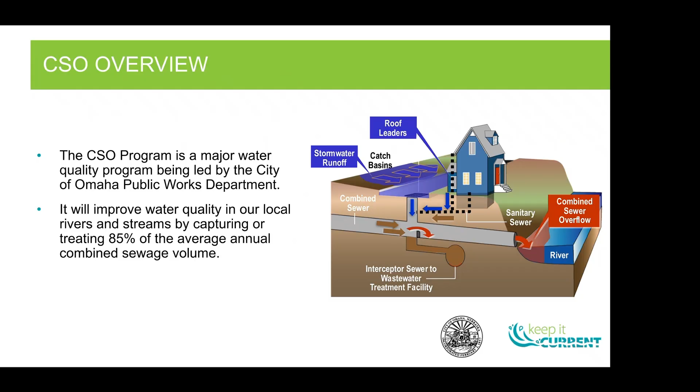The CSO program is a major water quality program being led by the City of Omaha's Public Works Department. This program was developed to help reduce the amount of combined sewer overflows that enter the Missouri River and Papillion Creek by capturing or treating 85% of the average annual combined sewage volume, therefore reducing the amount of untreated sewage that overflows into our rivers and streams when the sewer capacity is overloaded.

There are three primary goals for the CSO program. The first goal is to achieve regulatory compliance. This is achieved by meeting specific requirements as identified by the Environmental Protection Agency and the Nebraska Department of Environment and Energy. The second goal is to achieve economic affordability, which is achieved by minimizing cost impacts to ratepayers by completing CSO projects within or under budget. The third goal of this program is to achieve community acceptance. This is done by maintaining continuous public dialogue and providing information to the public, as well as pursuing opportunities for multiple benefits in CSO projects.

You may notice that the branding on this presentation has changed from the CSO branding you may have seen on past presentations to the Keep It Current branding. This is because as the CSO projects are being completed and the CSO program comes to an end, the city will continue to utilize the Keep It Current branding to help bring you information on all types of collection systems projects.

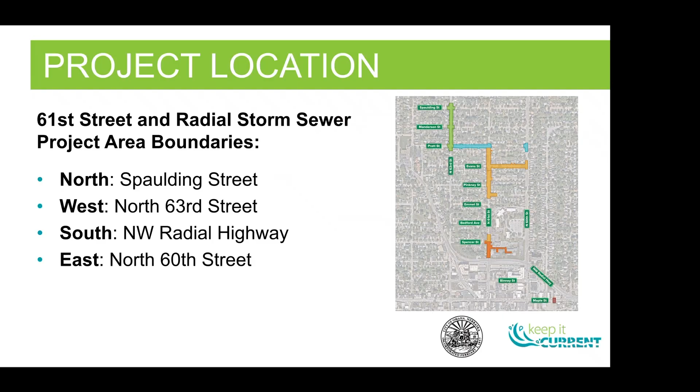Now, to go into more detail about our project, I'd like to begin by talking about our project area. The 61st and Radial Storm Sewer project area is generally bound to the north by Spaulding Street, to the west by North 63rd Street, to the south by Northwest Radial Highway, and to the east by North 60th Street. There is a small segment of work that will be required to be performed along Maple Street between Northwest Radial Highway and North 59th Street that will be discussed later in this presentation.

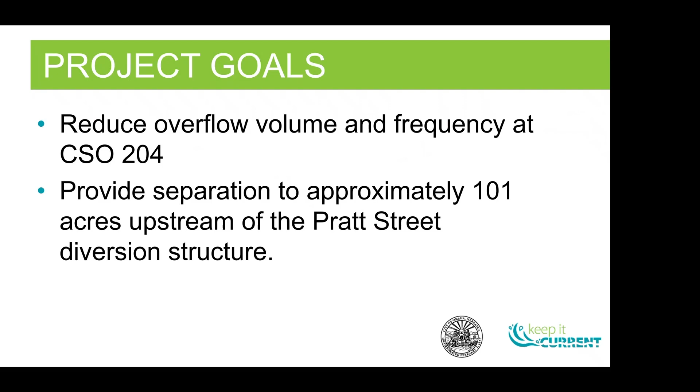The goal of this project is to reduce the amount of overflow volume and the overflow frequency at CSO 204, which discharges into Cole Creek. This will be achieved by providing separation to approximately 101 acres upstream of the Pratt Street diversion structure. This project will include improvements to the storm sewer system by constructing new storm sewers, as well as constructing new sanitary sewers. Existing combined sewers will be separated and reused as dedicated storm sewers. This project will also construct new storm sewer inlets within the project area and replace pavement and sidewalk.

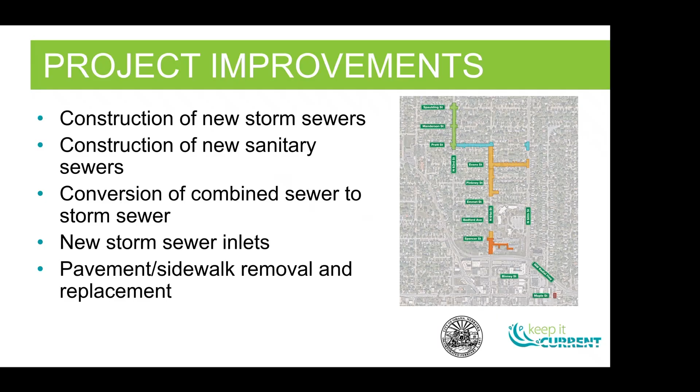Construction is anticipated to occur over a 2-year period, beginning in spring of 2027 and being complete in spring of 2029. It is anticipated that work will begin near the intersection of North 63rd and Spaulding Streets and continue to progress to the south and to the east.

Construction activities will include removing and replacing streets, removing and replacing driveways and approaches, removing and replacing sidewalks, with the replaced sidewalks being designed to achieve compliance with the Americans with Disabilities Act. New storm sewers and inlets will also be constructed. In order to complete this work, some tree removals will be required. Work will primarily occur within the existing right-of-way. However, some easements will be required to complete the work.

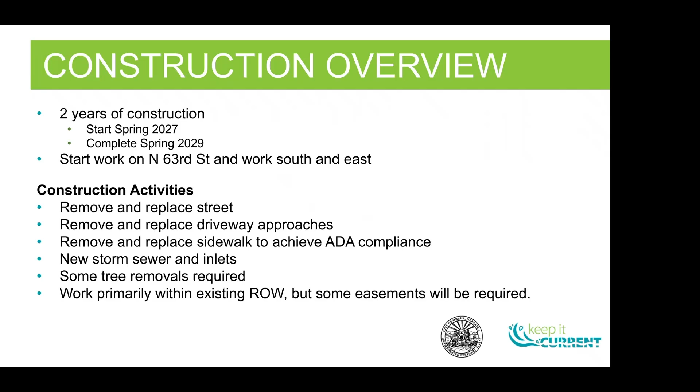The first steps to the construction process will be to begin relocating utilities within the project area. This means that MUD will be relocating gas and water mains prior to construction of our project, and OPPD will be relocating overhead power and power poles.

With the utility relocations performed, the selected contractor will be able to begin work on the project by performing surface removals, which includes removing pavement, sidewalks, and select trees. With the pavement removed, this will allow for the installation of new storm sewers, sanitary sewers, and inlets. Once these underground sewers have been installed, new pavement and sidewalks will be constructed, and all disturbed areas will be seeded with new grass.

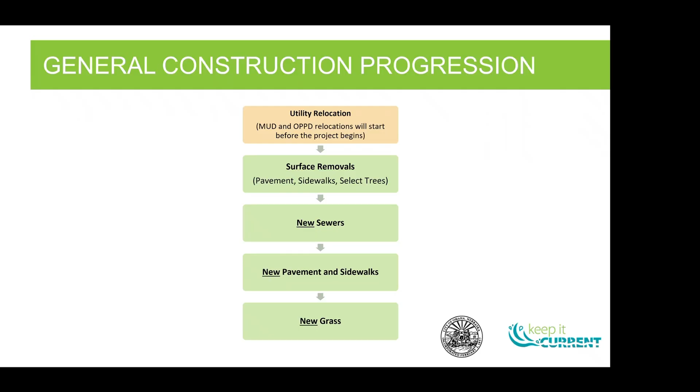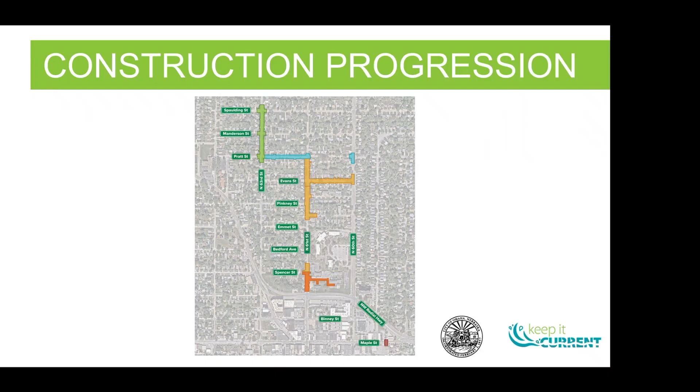Our project will be broken down into 4 phases, with work beginning near North 63rd and Spaulding Street and continuing to progress to the south and to the east. The first phase of this project will include work along North 63rd Street. This will include removing and replacing the roadway along North 63rd between Spaulding Street and Pratt Street. This is to allow for new storm and new sanitary sewers to be installed. This new storm sewer will help the project tie into the existing storm sewer system at North 63rd and Spaulding Street.

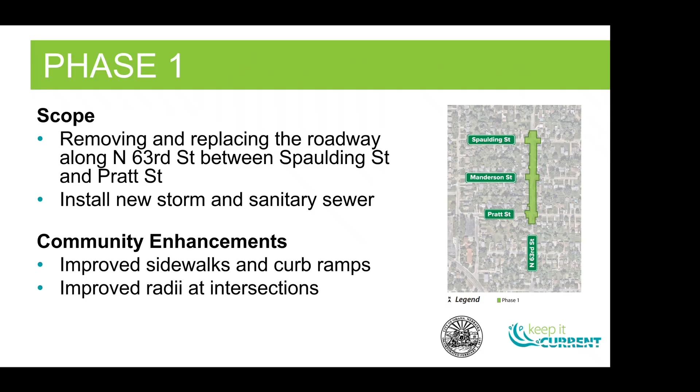This phase will also include improvements to sidewalks and curb ramps to meet ADA compliance, as well as improving the radii at intersections to meet current City of Omaha design desirables. In order to complete this work, a full road closure will be required along North 63rd Street from Spaulding Street to Pratt Street. During this time, temporary access will be provided to residents within the area. However, some day-to-day disruptions should be anticipated based on the contractor's activities.

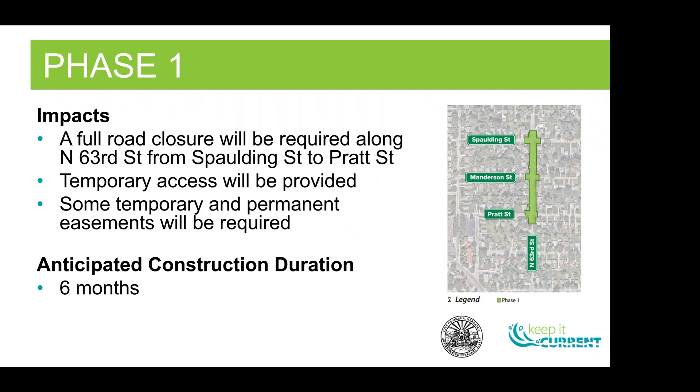Some temporary and permanent easements will be required in this phase. It is anticipated this phase will occur over approximately 6 months. During this time, detour routes for both pedestrians and vehicles will be posted, utilizing existing sidewalks and roadways within and adjacent to the project area.

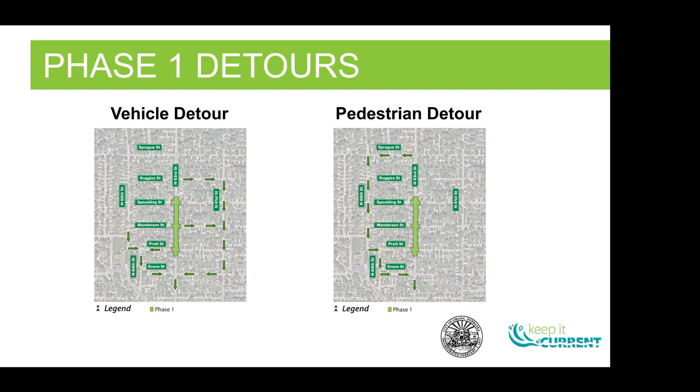Once all pavement has been restored during phase 1, the contractor will move to phase 2, which includes work along Pratt Street between North 63rd Street and North 61st Street, as well as work being performed within the North 60th Street and Pratt Street intersection. The roadway along Pratt Street will be removed between 63rd and 61st to allow for installation of new storm and sanitary sewers, as well as to allow for construction of a new diversion structure.

This new diversion structure will operate similar to the existing structure. However, this will allow us to reduce the amount of overflows that occur and send untreated sewage to Cole Creek. This new diversion structure will also help to reduce the amount of localized flooding in the area during rain events. Additionally, new sidewalk will be added to the south side of Pratt Street.

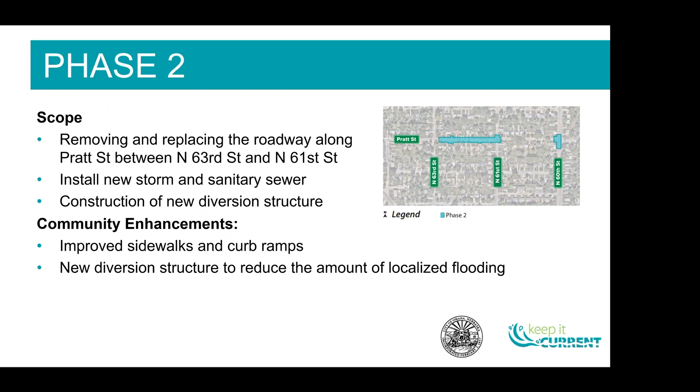The work on the North 60th and Pratt Street intersection is being performed to remove an existing sanitary service line from an existing combined sewer and rerouting this service to a dedicated sanitary sewer. This will help facilitate the conversion of the combined sewer into a dedicated storm sewer. While this phase is being constructed, a full road closure will be required along Pratt Street from North 63rd Street to North 61st Street. During this time, temporary access will be provided, though some day-to-day disruptions should be anticipated. Some temporary and permanent easements will be required to complete this phase.

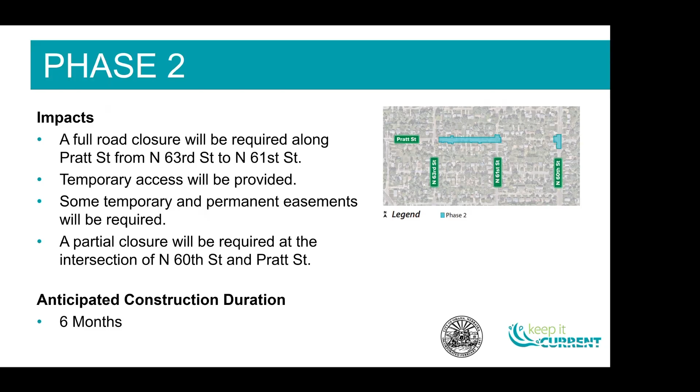Additionally, the work on North 60th Street will require a partial road closure at the intersection of 60th and Pratt Street. It is anticipated that the work will remain contained within the west 2 lanes of North 60th Street. Therefore, traffic control can be used to keep 60th Street open during construction. It is anticipated this phase will occur over a 6-month period. During this time, pedestrian and vehicle detour routes will be posted utilizing existing sidewalks and roadways adjacent to the project area.

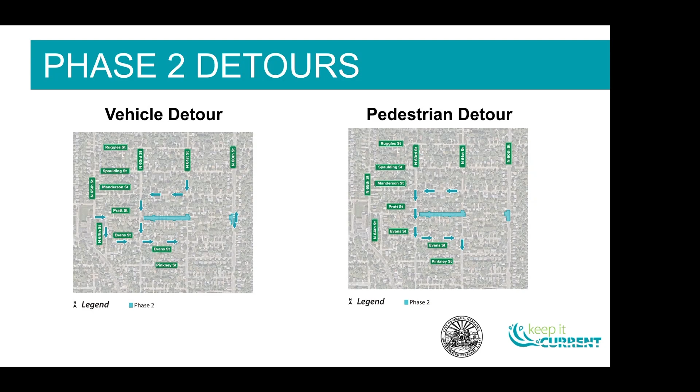Phase 3 will be broken down into 2 subphases. During both subphases, the construction will include installing a new storm sewer from Spencer Street to Pinkney Street using trenchless technology. While this is occurring, construction of Phase 3A will include removing and replacing the roadway along North 61st Street between Pratt Street and Evans Street to install new storm and sanitary sewer. Phase 3A will also include removing Evans Street between North 61st and North 60th Street to allow for the installation of new storm sewer. On Evans Street, the existing sanitary laterals will be rerouted to a dedicated sanitary sewer, helping provide further separation.

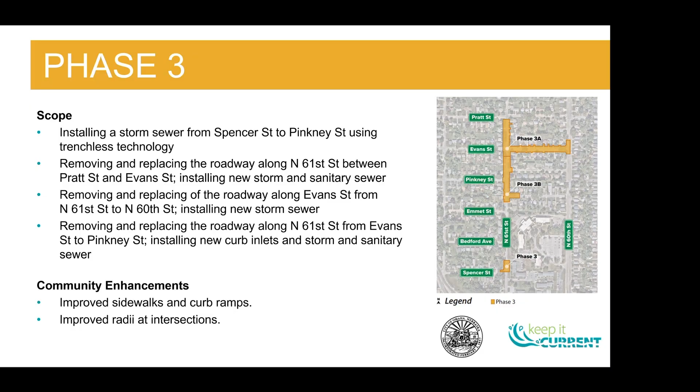Once all pavement has been restored in Phase 3A, Phase 3B will begin, and this will include removing and replacing the roadway along North 61st Street from Evans Street to Pinkney Street and installing new curb inlets and storm and sanitary sewer. The radii of the intersections within this phase will be improved to meet current City of Omaha design desirables, and sidewalks and curb ramps will be improved to meet ADA standards.

To facilitate the installation of the trenchless sewer, a full road closure will be required along North 61st Street between Emmet Street and the North Pinkney Street intersection, as well as along North 61st Street at Spencer Street. This closure will be in place throughout the duration of the tunneling activities.

Phase 3A will require a full road closure along North 61st Street from Pratt Street to Evans Street, and from Evans Street between North 61st Street and North 60th Street. Lane restrictions will be required on North 60th Street at Evans Street while the work is being performed within the intersection. Upon completion of Phase 3A, traffic control will be installed for Phase 3B and will require a full closure along North 61st Street between Evans Street and Emmet Street.

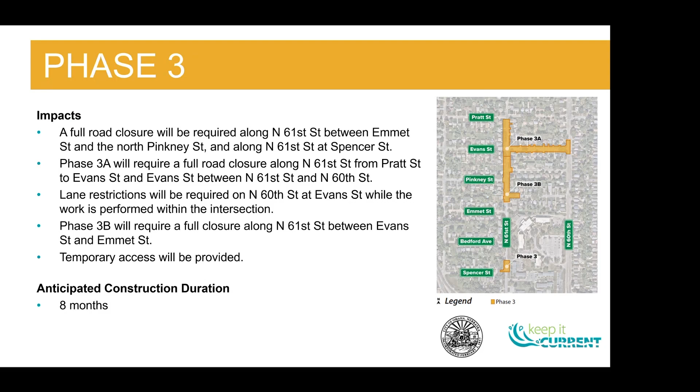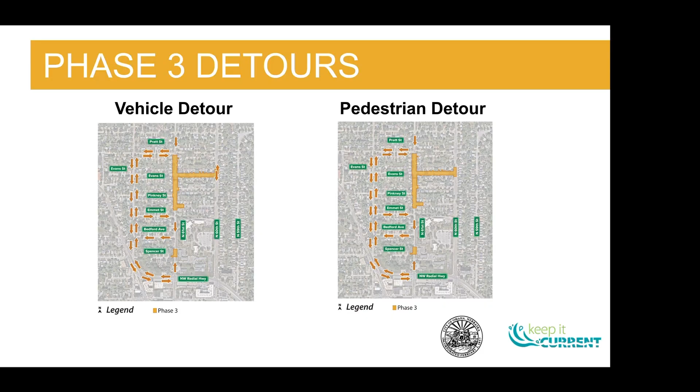During all subphases of Phase 3, temporary access will be provided. However, day-to-day disruptions may occur. It is anticipated Phase 3 will occur over an 8-month period. During this time, detour routes will be posted for pedestrians and vehicles to use existing sidewalks and roadways adjacent to the project area to navigate around the construction area.

Phase 4 of this project involves rerouting existing sanitary sewer laterals to remove them from a combined sewer and connecting them into a sanitary sewer. This will allow for the combined sewer to be converted into a dedicated storm sewer and then be connected into the newly installed storm sewer system. In order to complete this work, 61st Street will need to be removed and reconstructed between Spencer Street and Northwest Radial Highway.

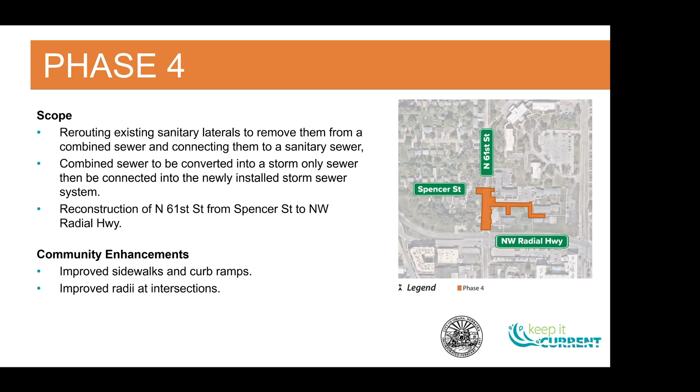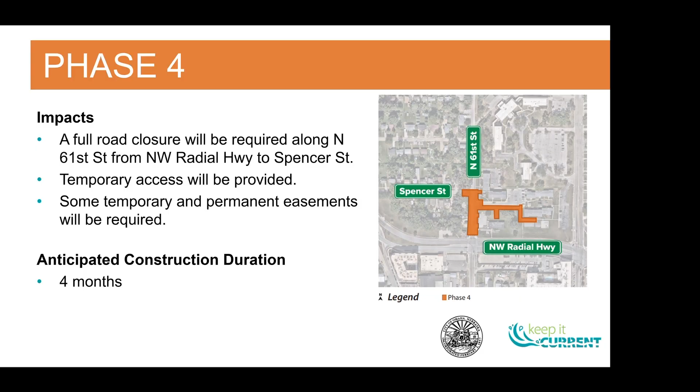A full road closure will be required along North 61st Street between Northwest Radial Highway and Spencer Street to complete this work. However, temporary access will be provided to properties within this area with the potential for day-to-day disruptions. Some temporary and permanent easements will be required to complete this work. It is anticipated this work will occur over a 4-month period. Detours will be posted for both pedestrians and vehicles during construction of this phase.

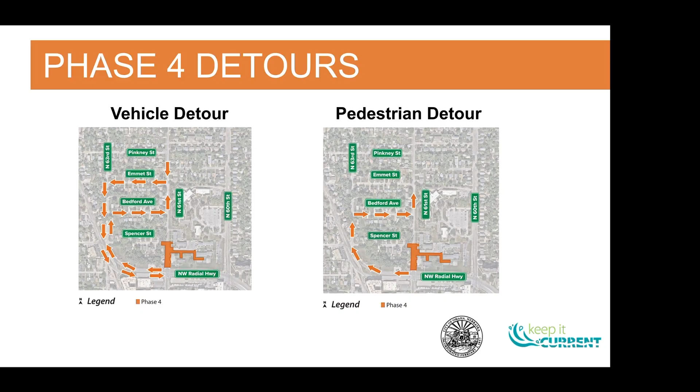I mentioned previously that there is a small amount of work to be performed on Maple Street between Northwest Radial Highway and North 59th Street. This work involves rerouting an existing sanitary lateral and routing it to a designated sanitary sewer, which will allow us to convert an existing combined sewer into a dedicated storm sewer.

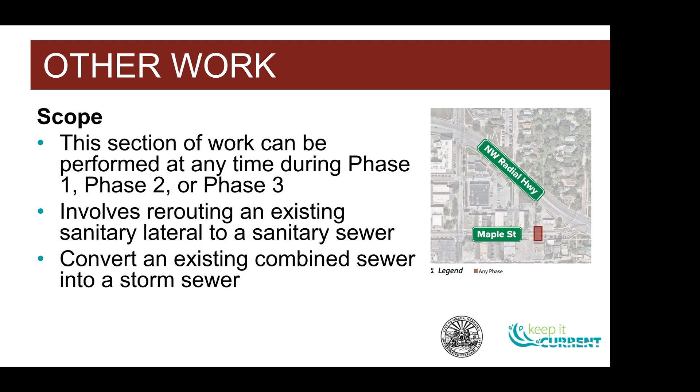This work can be performed at any time during Phase 1, Phase 2, Phase 3, or in the very early part of Phase 4 before the connection is made to tie in the upstream system into our new storm sewer system. During this time, vehicle detour and pedestrian detour routes will be posted.

I wanted to talk about our project schedule. We began conceptual design back in spring of 2023. We completed intermediate design in fall of 2025, which is currently under review by the city. Final design is beginning in winter of 2025 and is expected to be complete by summer of 2026. The project will then go out to bid by contractors in late fall or early winter of 2026, with construction being able to begin in spring of 2027 and complete by spring of 2029.